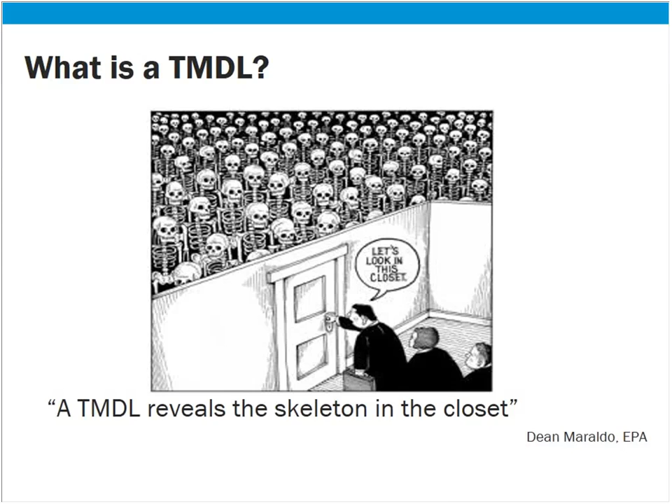As an example, Wisconsin is currently developing large scale TMDLs covering the Wisconsin River Basin and Upper Fox, but we started out with the Rock River and the Lower Fox. Both of those areas had substantial urban areas. As we developed those TMDLs on a basin scale analysis, we started to run into challenges with how to link that TMDL analysis with the implementation that was going to follow.

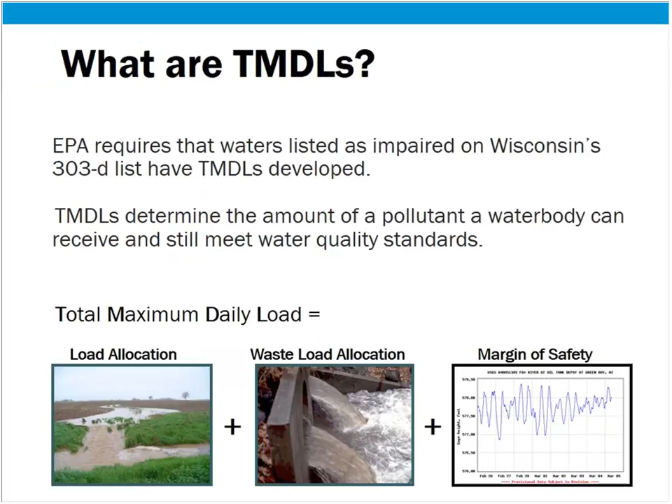Quickly, everyone on the call should know exactly what a TMDL is. It's the total maximum daily load, broken into the load allocation and waste load allocation with a margin of safety. That waste load and load allocation are again broken into a waste load allocation and load allocation. We'll be emphasizing the permitted MS4s on this call, but the load allocation also includes a set aside for non-permitted MS4 areas.

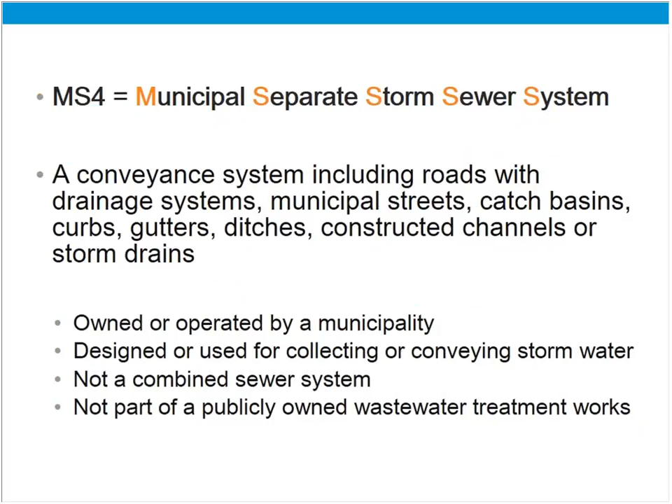A definition of the MS4: it's the conveyance system including roads with drainage systems, municipal streets, catch basins, curbs, gutters, ditches, constructed channels, or storm drains. They are owned or operated by a municipality. A lot of times I hear the term MS4 misused because people imply that the permitted municipal area is an MS4. An MS4 can be part of a permitted or unpermitted municipality—it's just that the drainage system is owned or operated by a municipality. It is also not a combined sewer system and not a publicly owned wastewater treatment works.

Another thing with TMDLs: they must have an expression of the allocation on a daily basis. This is one of those skeletons in the closet, because when we were working with our MS4s, it doesn't rain every day, it doesn't rain every week. So when they were seeing allocations on a daily basis, they were really struggling with exactly how they're going to meet them. They said, well, we meet them on the dry days, and on the wet days, we don't.

But a TMDL can be implemented on different time steps. Right now, as Caroline goes through the SLAMM model, we're using an annual implementation, but Roger will be touching on research which will eventually move us toward a seasonal implementation, especially when you look at the phosphorus loading patterns of spring and fall being the dominant time periods for phosphorus loading.

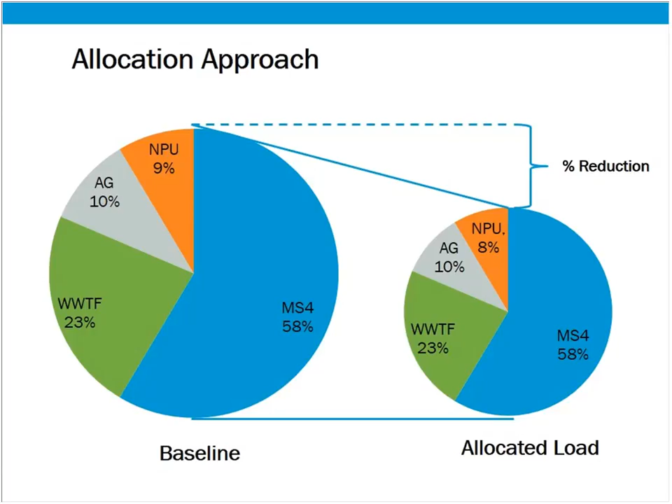What we've done in Wisconsin is use a proportional reduction methodology based on that baseline condition. I think what's important to take away from this slide is the term baseline—it's not an existing load, it's a baseline load based on regulatory requirements and obligations.

On the agricultural side, or non-point side, we also mirrored this approach and have a series of performance standards. So when we look at the first step, the TMDL, we see where these statewide requirements are. If these are being met, where are we at with our pollutant load? Do we meet the water quality target? If we do, we're done. But in most cases those performance standards were not sufficient, so we do additional reductions from that baseline condition.

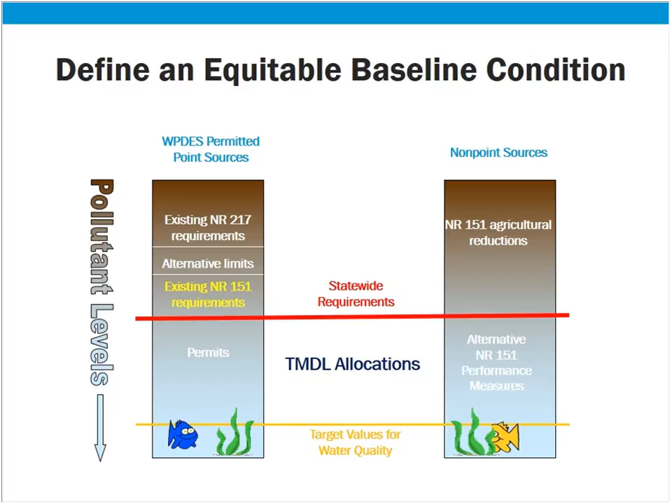So the terminology that becomes important as we move forward with the next presentations is this existing conditions, baseline, and no control. Baseline is what the stormwater or municipality would be discharging if they met the NR 151 requirements. Existing is where they are at now relative to that baseline condition, and no controls is something we've defined in our guidance, which lays out exactly what that load would be if there were no stormwater controls present.

And under certain road widths, for example, and certain development patterns, we have something called standard land use files, which really set that no-control condition. So if a municipality wants to start embracing green infrastructure and narrowing their roads, for example, you can get credit for that, because your no-controls baseline is the standard development pattern.

So a little background on NR 151, subchapter 3 covers these non-agricultural performance standards. We have performance standards for post-construction and new development, but the one that really gets pulled in for the MS4s is our developed urban area standard. We had promulgated a rule that required a 20 and 40% reduction in TSS that enters waters of the state, and this was done through a modeling approach.

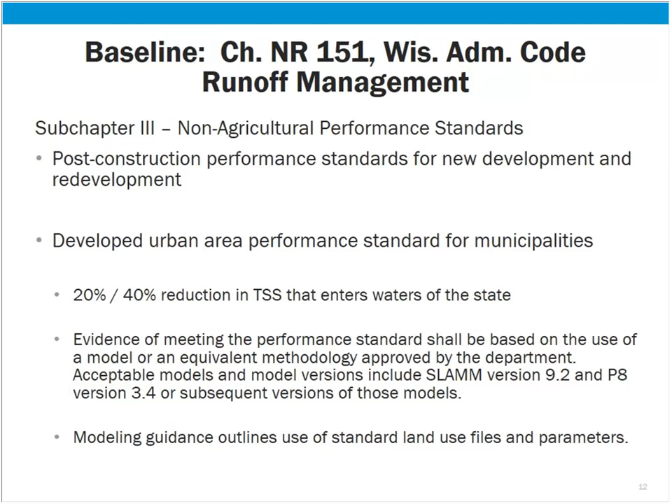So again, I mentioned earlier that the model used most is SLAMM, and then to some extent also P8. There'll be much more information coming on about SLAMM in a few minutes, but it has been used across the country, and a lot of the data that's used to support it is readily available, and both Caroline and Roger will be speaking on that.

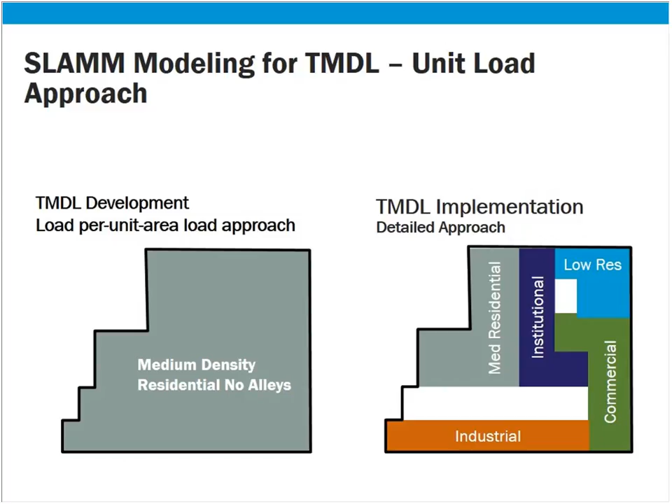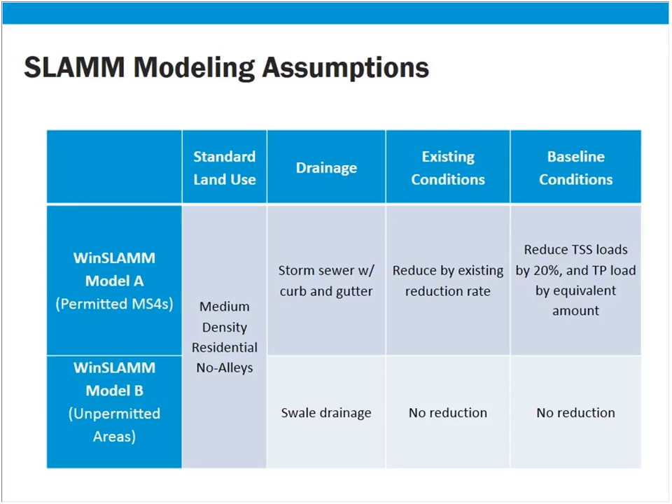So when we do this analysis, the slide shows that standard land use file, and Caroline will be covering what the standard land use files are, but this is, again, medium density residential with no alleyways. And when we do this analysis, we break it out for permitted and unpermitted, and we adjusted those files based on whether it was permitted or unpermitted. For the most part, our unpermitted areas are the smaller municipal areas that tended to not have a significant amount of curb and gutter, so they were given a swale drainage. Then they start off at an existing condition, and the baseline for the TMDL is a reduction of 20 or 40% in the equivalent TP load for that baseline TMDL analysis.

One of the questions we've gotten early on from the consultants is, why didn't we just use the analysis they did already, since they've all modeled the MS4s? One of the things is that rule NR 151 established a definition for what the developed urban area was, and that doesn't necessarily encompass the entire city or village that would be permitted under the TMDL. So a lot of municipalities will be having to update their NR 151 analysis. Also, the time period used for the NR 151 analysis tended to be a 1 or 5 year simulation period, whereas for the TMDL we're doing simulations to match the often 10 or 12 year period that's used in the TMDL.

I covered earlier about the Milwaukee TMDL, and it was a very large scale TMDL with 43 permitted MS4s and 12 general permits. It's important to note that we don't differentiate our requirements between permitted individual and general permit MS4s, and we also don't differentiate requirements between phase 1 and phase 2.

So in this case, the TMDL analysis was a little different in that the urban loading analysis was performed using a model called HSPF, part of a previous study done for a regional water quality management plan. But one thing that came up early on is that HSPF didn't differentiate between the different source areas to the same extent that SLAMM does.

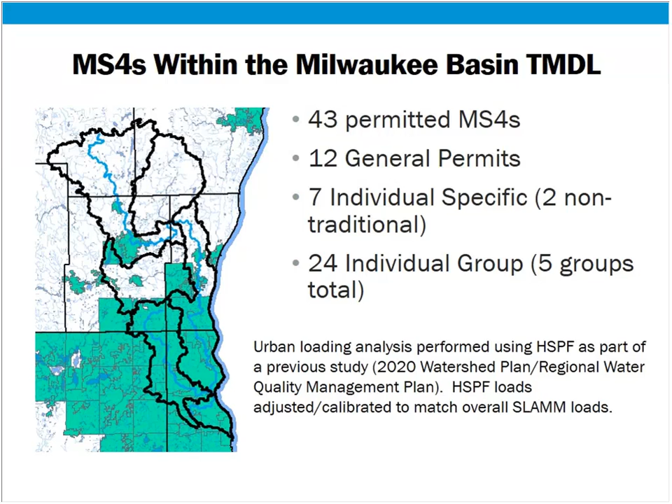So again, we were able to account for these source areas and stuff that I think you'll see are very important as Caroline goes through part of her presentation.

Another thing that came up in the Milwaukee project was addressing combined sewers, and I know this is an issue across the country. In Wisconsin, only portions of Milwaukee and Shorewood, a suburb located just north of Milwaukee, are covered by combined sewers. One thing that was interesting is when we did detailed SLAMM analysis of that combined sewer area, because all that stormwater runoff was being captured and treated by the wastewater treatment plant, there was actually a 95% reduction in the stormwater loadings going to the receiving waters.

But obviously the issue with the combined sewer is combined sewer overflows. So Milwaukee Metropolitan Sewerage District had embarked on constructing a deep tunnel system, which on average now results in just under 3 discharges a year under extreme events. Those CSOs are regulated under Milwaukee Met's permit, which includes a long-term control plan with the elimination of CSOs. So when we addressed the CSO aspect in this TMDL, they were not assigned a waste load allocation, because the permit assumes there will be an eventual elimination of the CSOs through their long-term management structure.

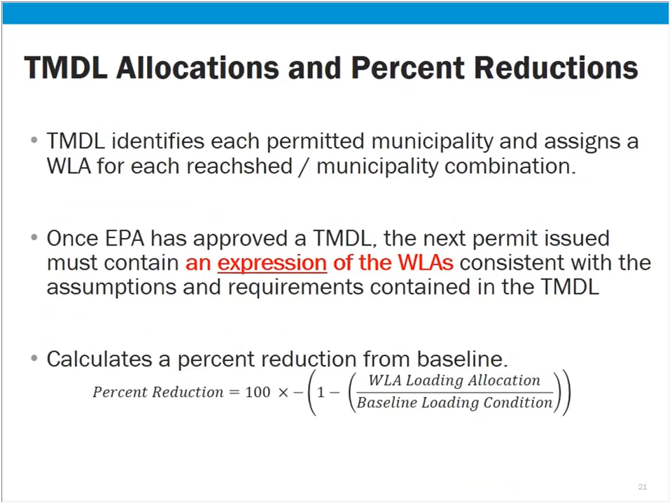What I have here is the calculation of the percent reduction from baseline. So when we set that waste load allocation, we can go back and compare it to the baseline loading condition and calculate the percent reduction needed for the municipality to meet the TMDL.

So we've gone forward with an implementation strategy using percent reduction, and there are a couple of reasons for that. One is that the aerial extent of the MS4 boundaries doesn't always match what was used in the TMDL—municipal boundaries are constantly expanding or changing, so it's hard to get an exact boundary set. This percent reduction approach allows flexibility in addressing changes in the municipality.

Another big issue is that at the basin scale, storm sewers significantly change what might look like surface topographic breaks. So the percent reduction approach lets you continue applying that percent reduction to a reach shed regardless of how boundaries change due to storm sewers.

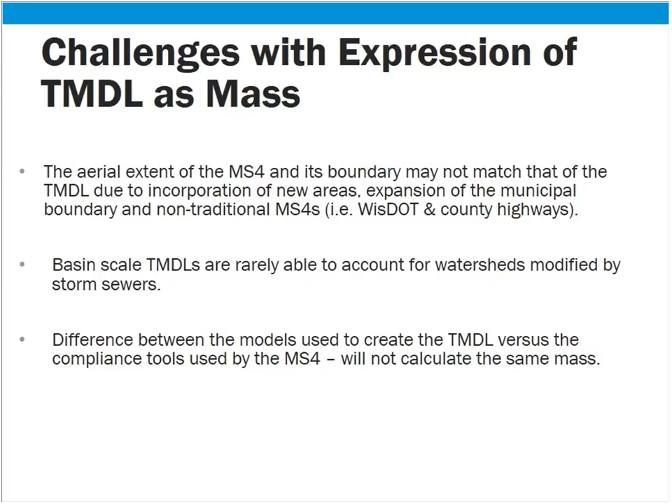Another reason is that this percent reduction framework was already in place as part of NR 151, so it was something all our municipalities were comfortable with and had already engaged in. Most of them just take the models they already have, maybe expand them a bit to include areas not previously incorporated, and then check where they stand in relation to the percent reductions from the TMDL.

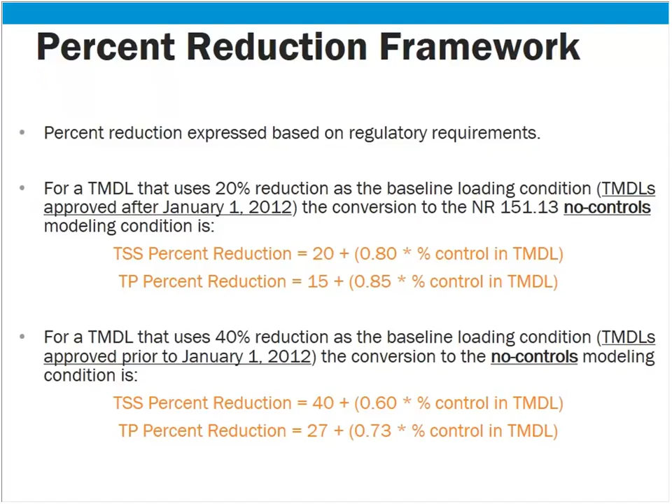One thing I mentioned earlier is that we have this 20% reduction and 40% reduction. The guidance outlines both requirements, and everything is measured from a no-controls baseline, so it's expressed in the same terms NR 151 used. We had to include both 20 and 40% because our legislature repealed the 40% requirement. So we have TMDLs developed before January 2012 that used 40%, but now all of them start at a 20% baseline.

In implementing the percent reduction framework, the municipality goes through and does their analysis at no controls, applies that percent reduction, and gets the total mass they need to reduce to meet the TMDL. That mass might differ from what's in the TMDL's waste load allocation for numerous reasons, due to different scales of modeling and other factors, but in general we've found they're within a few percentage points of each other—very close.

Then what the MS4 does is go through and see where they stand in relation to these needed reductions, and they start moving forward with a plan.

TMDL reduction or compliance was something that was maybe a little difficult for a lot of municipalities to grasp initially—that the TMDL reductions are modeled or simulated predictions of the reductions needed to meet water quality standards. So many municipalities thought that if they meet these percent reductions or waste load allocations, they're in compliance and done. But in actuality, it's the ambient stream monitoring that determines whether the water body can be delisted. So ultimate compliance is tied to delisting the water body.

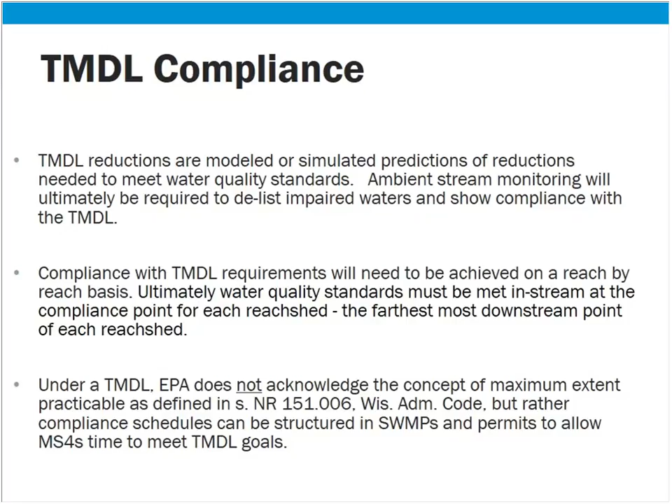TMDLs don't acknowledge this concept of maximum extent practicable, where the TMDL is set to meet water quality standards. So if a municipality says we can only get to, let's say, a 50% reduction, and the TMDL calls for an 80% reduction, there's not the use of a maximum extent practicable where they can say, oh, we're done at 50%. So what we were able to negotiate with EPA is an extended compliance structure that allows MS4s time to meet the TMDL goals. And the best way to meet those is through redevelopment.

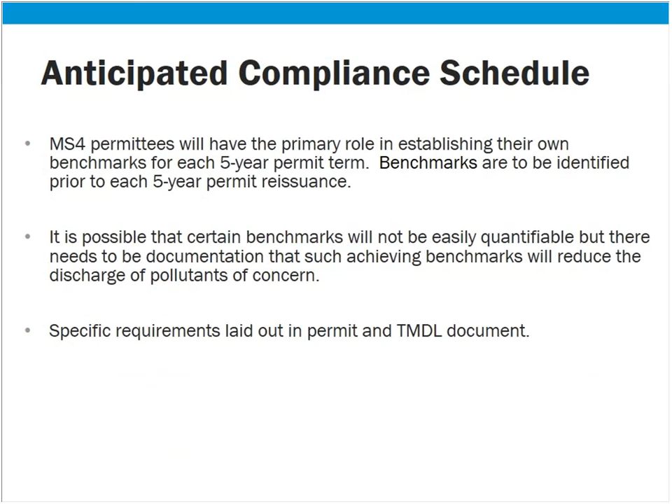How we set up the compliance is that the MS4s will have benchmarks that they set for every 5-year permit term, and those benchmarks are identified in each permit. To some extent, the MS4s will take a very active role in establishing what those are. Those benchmarks can be a combination of practices simulated in SLAMM or other practices that may ultimately get us to the water quality standard. Those specific requirements are laid out in the permit.

Again, I mentioned earlier that our permits, whether they're phase 1 or phase 2, are all the same. So starting out, the first permit term after the TMDL is approved, the municipality goes through, updates their storm sewer map, and identifies any areas that should be excluded or included that were not originally included or excluded in the TMDL. Then they start doing their SLAMM analysis and provide a summary of where they're at in relationship to the TMDL reduction—basically, what's the existing load. And then they come up with a plan to show overall progress in meeting those TMDL reductions.

Again, if you're interested in seeing more about our permits, that's also on our webpage. So if you go from the Stormwater site and just click on permits, that'll take you to this website.

So with that, I'll be handing off to Caroline, who will be covering the SLAMM analysis. I'd also like to thank both Dave Werbach and Bob Newport from EPA Region 5, who worked with us extensively to develop this approach and sat on an extensive team that I think Jim was on. We had municipalities from around the state who helped develop this approach.

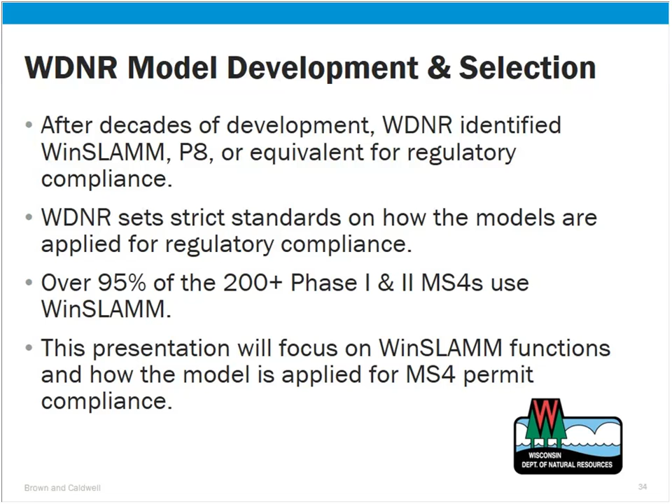So what can WinSLAMM do? Why would you use a model? Why wouldn't you just use the standards that the DNR has in place? Well, it can tell you the actual sources of where the pollutants are coming from.

It can tell you where the pollutant loadings are for different land uses without any stormwater control measures in place. It can tell you how these things change as development increases—say, low density development to medium density to high density development. It will tell you what different stormwater control measures will do, and then you can put in various treatment trains of stormwater control measures to meet the regulatory requirements and the cost, to find out what will help you meet the requirements with your least cost option. And basically, said a different way, which drainage areas generate the highest versus lowest loading—we have some graphics later that give an example of that.

How much pollution control do individual treatment systems achieve? If, as Kevin said, you need to reduce phosphorus by X%, how can you do that?

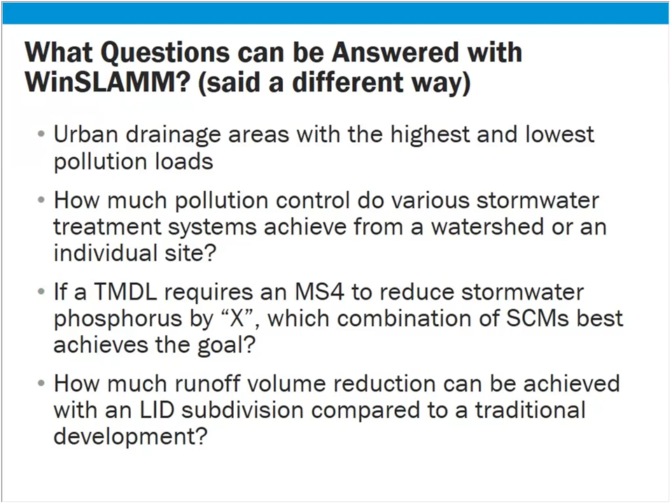So what can't you do with WinSLAMM? This is very important: it does not evaluate the runoff volume from snow melt. So for areas of the country that have winter, where it snows and the snow stays on the ground through the winter and then melts in the spring, it does not evaluate the runoff volume from the snow when it melts, but it will evaluate the pollution load left on the ground after the snow melts.

It also does not evaluate base flow conditions in the stream. It generates the urban pollution load to the stream, not the runoff volume present in the stream during dry weather conditions. It doesn't do in-stream processes, so it will not route your pollution loading through a river or a lake.

It does generate hydrographs and particle size distributions, and it does route them through the control practices, but it doesn't do complete routing like SWMM does with the St. Venant equations.

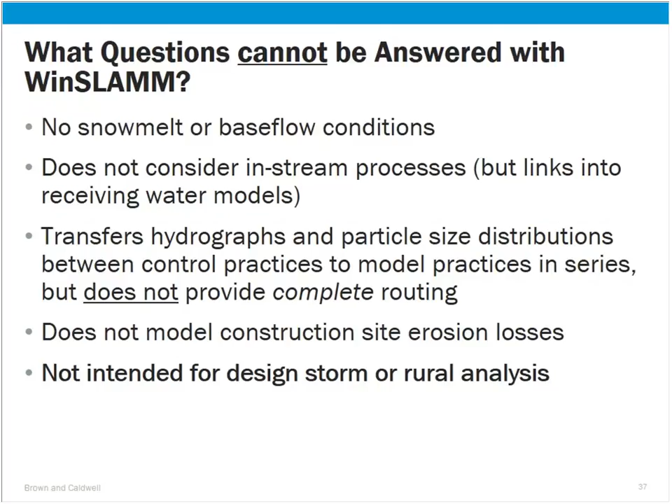It doesn't do construction site erosion, so it is a developed urban pollution model, and it does not do design storms, so your SCS type 2, 100-year storm, not that type of model, and also is not an agricultural model.

So what can it evaluate? This is a list of some of the pollutants it can evaluate. Runoff volume and TSS are always evaluated, and then you can add these other pollutants. And if you have data for a pollutant that's not on the list, you can add that pollutant too.

You can basically create your own pollutant file and then also evaluate that through the various stormwater control measures that are in the model.

So what stormwater control measures are in the model? This shows a list: wet detention ponds, porous pavement, street cleaning, catch basins if they have sumps and are cleaned, grass swales and filter strips, biofilters, bioretention, infiltration, green roofs.

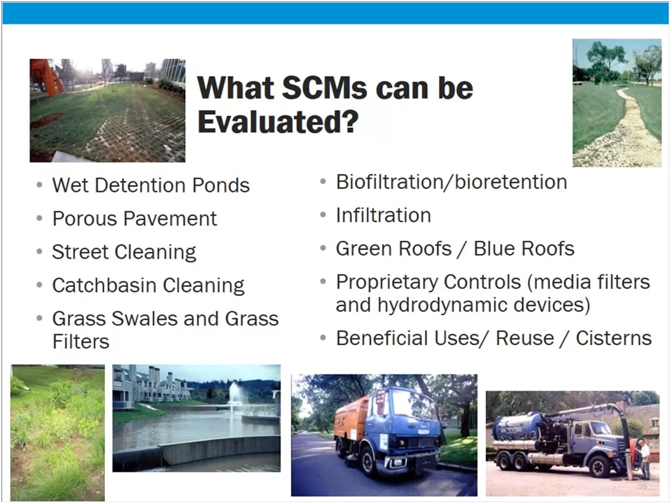We just added media filters, and then beneficial uses like reuse and cisterns. So all these stormwater control measures are in the model, and they all use their processes and the research data that has been collected over the years to evaluate their effectiveness.

So where did WinSLAMM come from? It started its development in the 1970s, and it actually stemmed from street cleaning. And then it slowly grew through basically lots and lots and lots of research. Roger Bannerman, who's going to speak last, is intimately familiar with a whole bunch of this research.

And then the first Windows version was developed in 1995. In the 2000s, we moved it from a text-based version to a database version, and very, very soon it is going to be compatible with GIS, and it is continually being updated with research data as it becomes available.

So why is it unique? Well, it's based on actual monitoring data, so the results you get really do match what you get in the field, assuming your rainfall files are what actually happened and your drainage areas are what actually happened.

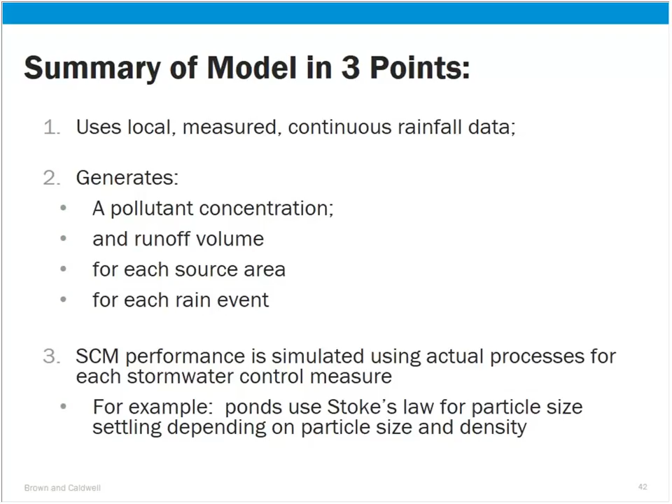So the model is all based on small storm hydrology. Some of the various states' stormwater manuals do use a subset of small storm hydrology. They don't go as detailed as it, but they do use a little bit of it. So as we're going through it, depending on the state you're from, you might recognize some of the equations once we show you those. But small storm hydrology is basically the concept that the smaller and medium-sized rainfall events generate most of the stormwater pollution.

So the small rains, the smallest ones, typically less than half an inch, they account for the largest number of rain events. And ideally, if you could, you would infiltrate these so that you'd essentially eliminate the runoff from these in an ideal world.

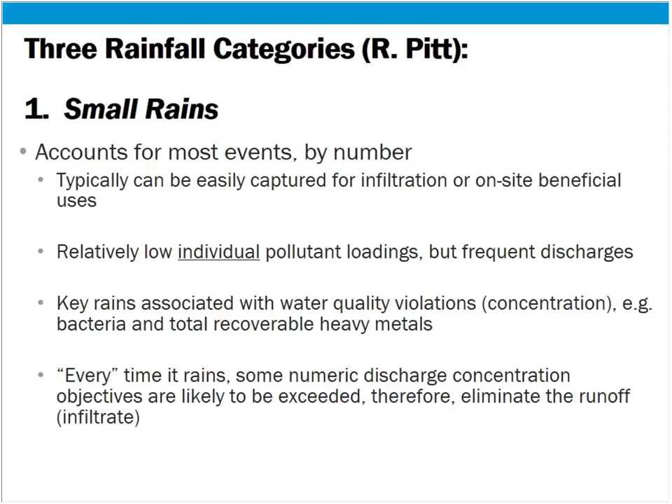And this is all from Dr. Pitt's research. Dr. Pitt is the main author, the original main author of the model. The medium rainfall events, so typically from half an inch to 2 inches, depending on where you are in the country, are responsible for most of the pollutant mass discharges.

So in this category, you want to either capture them and infiltrate them if you can, but once you get more towards the 2 inches, it's hard to infiltrate something that large, so then you're going to move more to the treatment of it instead of infiltrating the entire thing.

And then the large ones, these are more what we would think of as our design storm events. Those are not cost-effective to treat in terms of stormwater pollution reduction. And these are typically the events we think of when we think of flooding. So we want to make sure that our wet detention ponds and our biofilters can handle these and not be hurt when they come through them. But they're not necessarily going to fully treat all the runoff from, say, a 100-year event.

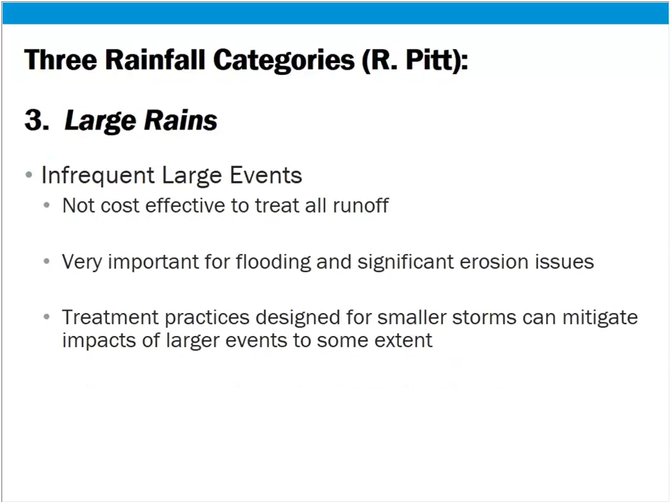So this again reiterates small storm hydrology, and the reason we reiterate this so many times is because a lot of stormwater practitioners, when they start their careers, started with design storms. So when we move into WinSLAMM modeling and water quality modeling, we're moving away from the concept of design storms to continuous simulation, looking at the smaller storms, because most of the pollutants from stormwater runoff come from the small and medium-sized storms.

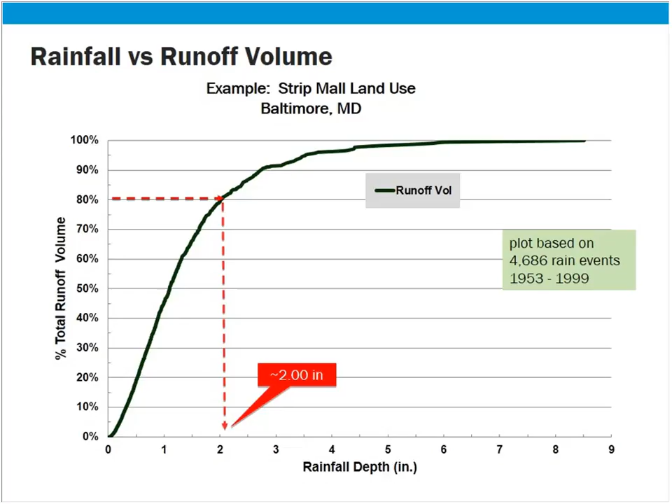And then, from small storm hydrology, because we're looking at each of the rain events, the very smallest to the largest, what also comes out of small storm hydrology is that within each land use, and then within each land use, are all these source areas. So within residential, commercial, industrial, institutional, you have roofs, parking lots, sidewalks, streets, landscaped areas.

Well, a parking lot in a residential land use generates a different concentration than a parking lot in a commercial land use. And we know this because of all of the research data that's been collected through the years. So when you do your WinSLAMM evaluation of your municipality, and you're modeling your parking lots and your roofs and your sidewalks and all these different land uses, the model is calculating the runoff volume and the pollution loading for each of these source areas and each of these land uses, and it's calculating the different runoff volumes and pollutant loadings, and they're all different concentrations.

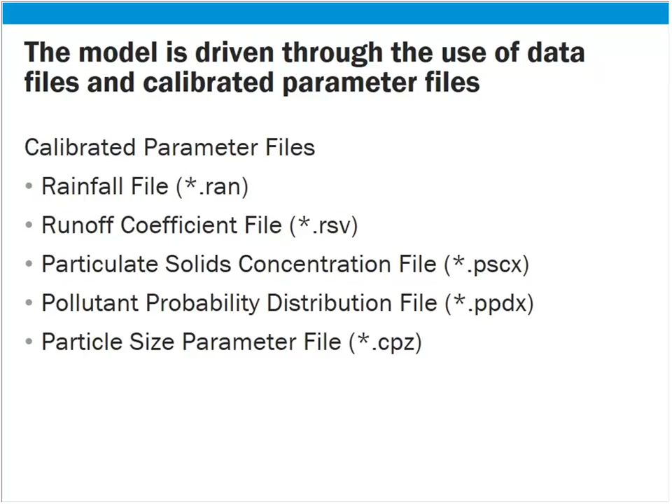You can see there are files for the East Coast, Southeast, Great Lakes, Central, Southwest, and Northwest. These come out of the National Stormwater Quality Database, plus the work of various researchers.

Okay, so here's the guts of the model. For those of you in other parts of the country, you'll recognize some of these equations, because when you're generating your water quality volume that you have to treat, this is the equation you actually use. It's simply calculating your runoff volume: your rainfall depth times the area of your source area—your roof, sidewalk, grass—times your runoff coefficient, times the unit conversion. What makes WinSLAMM different is it's doing this for every single source area for every single rainfall event. So there's a different runoff coefficient for a half-inch rain on a roof than there is for a 1-inch rain, or for a sidewalk.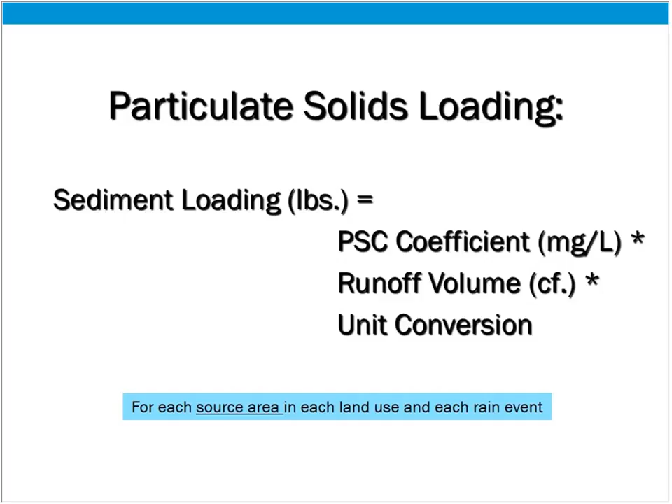Then come the pollutants. Once it calculates runoff volume and sediment, it calculates the pollutants using two different equations depending on whether it's the dissolved or particulate pollutant. For the particulate pollutant, it uses the particulate solids loading calculated earlier times the pollutant probability distribution coefficient times the unit conversion. For the dissolved portion, it uses the runoff volume times the pollutant probability coefficient in milligrams per liter times the unit conversion. These coefficients are based on research data collected for each source area, and again it's calculated for each source area, in each land use, and each rainfall event.

Once it calculates this for all the source areas and land uses for the rainfall event, it summarizes everything and sends it down the network to the stormwater control practices.

Then there are the particle size distributions and hydrographs, also generated through the modeling. Both are modified as they're routed through the stormwater control measures. Depending on the type of control measure—say street cleaning—it may only remove the larger particle sizes. So the streets are cleaned, and the resulting particle size distribution is then sent, say, to a wet detention pond, which receives that distribution and the hydrograph and further treats the stormwater runoff.

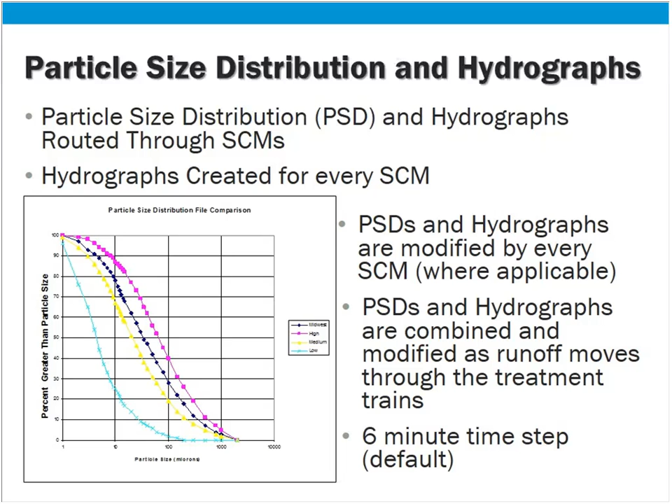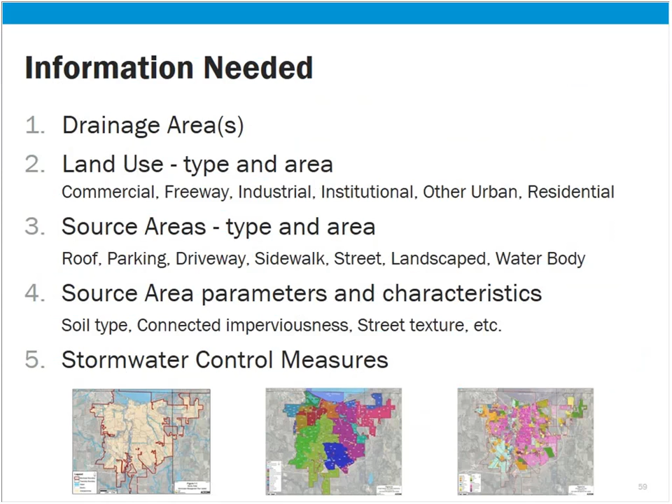Now you might be saying, wow, there's no way I'm going to collect all the sidewalks and roofs and driveways for my municipality. That's just way too much. So one tool that's been developed by Roger and others are standard land use files, and Kevin touched on this a little bit. These are files that work within SLAMM, and they are 100-acre unit files that represent typical land uses that you would see in a municipality.

So there are files, for example, 100 acres of medium density residential, 100 acres of medium industrial, 100 acres of a park, 100 acres of a shopping center. And so we use these files so that we don't have to measure source areas and whether or not they're connected or disconnected.

Now, when we use these in different parts of the country, or parts of the world, for example, we did a project in Calgary, Alberta, Canada. Their high-density residential was a lot denser than our high-density residential. So we created a Calgary high-density residential standard land use file and used that.

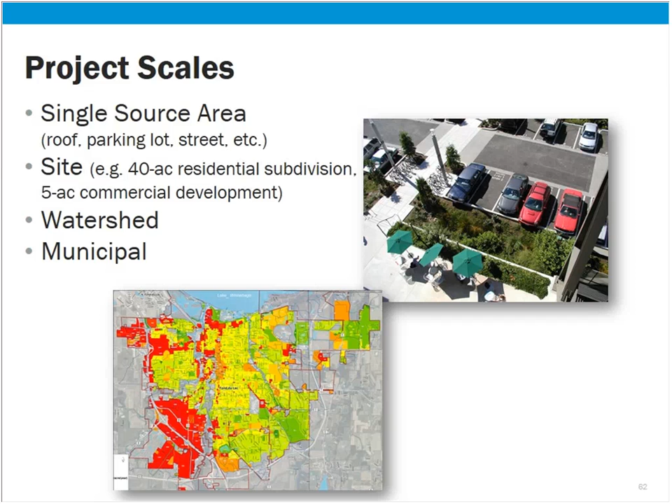And then again, more types of projects - green infrastructure and low impact development. Those are very important tools in our toolbox to help us meet TMDL compliance. So we're using the model for both those.

New development and redevelopment in Wisconsin - municipalities, municipal engineers require their consultants to use either P8, SLAMM, or an approved equivalent to show that they're meeting their ordinance.

And then the alternatives analysis and stormwater control design. When we go to the next level from planning to design, we use SLAMM to make sure that we're still achieving the goals that we wanted to achieve with the actual outlet structure and configuration that we are putting out in the field.

And as the model grows and as our users grow, we add more and more types of output. A lot of the output available in the model is a result of our users and what they want to see, what they need to see for their regulatory compliance. So this list shows you just a few examples of what you could get out of the model if you needed it. And we're always adding more pieces depending on what our users need to see.

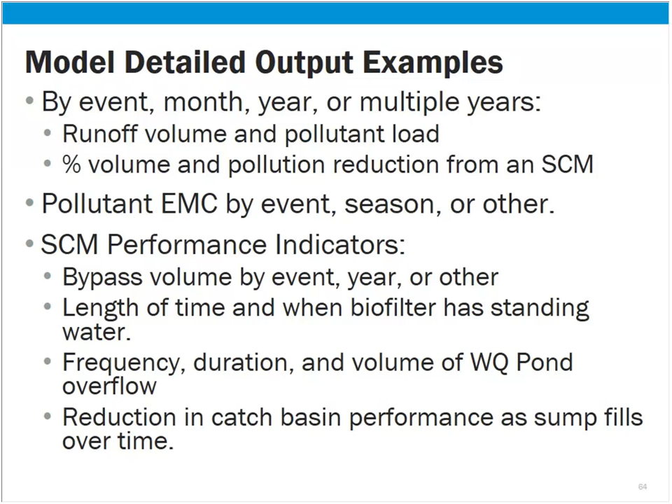Yeah, I've had a couple that have come in, so I'll try - and I think some of them were answered as we continued through the presentation, so I'll try not to ask those, but for those who entered them in the chat box and you had a piece of the question that you don't think was addressed, and I skip over it, please let us know in the survey at the end, and we'll make sure we get exactly what you want answered. So two quick clarifying questions for Kevin. One was what municipalities specifically were talking about for this webinar. And then the second question was just for clarification, confirming that the MS4s baseline is always equal to the TMDL allocation, or is that not always the case?

I'll start with the second question. The baseline used for the TMDL is always set at that NR 151 requirement, which is that 20 or 40% reduction. So what Caroline just covered, all our municipalities have gone through and done this analysis, and that 20 or 40% reduction is applied to those municipalities. That resulting pollutant load is used and fed into the TMDL analysis to say, are we meeting water quality standards? And if we're not, we start a proportional reduction going down from that baseline. So the baseline always starts at those NR 151 requirements.

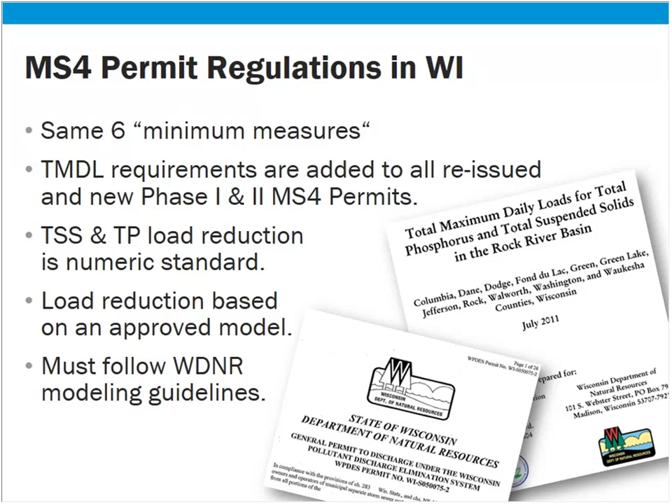So just as an example, this is just a generic example. If you had a waste load that said you had to reduce your pollution, whether it's sediment or phosphorus, let's talk about phosphorus, by 50%. The basic steps: figure out what your base condition level is. As Kevin said, that base condition is the pollution level under meeting the former NR 151 requirements, which every city has to meet. Think of it kind of like a secondary treatment level for wastewater.

Everybody's got to do that, and then there's more treatment above that normally required to meet a water quality condition, but the first level of compliance is this base condition, meeting the NR 151 requirements. Let's say you had to reduce this by 50% to get to a certain TP phosphorus goal, and that goal is set for each impaired water within the urban area, and you go about figuring out how to achieve that reduction.

Now I'm going to make this into a real example here, so I don't want to dwell on this slide. The guidelines that DNR has out there, again, as Caroline alluded to, they have standardized rainfalls to use depending on what part of the state you're in. There are 5 different regions.

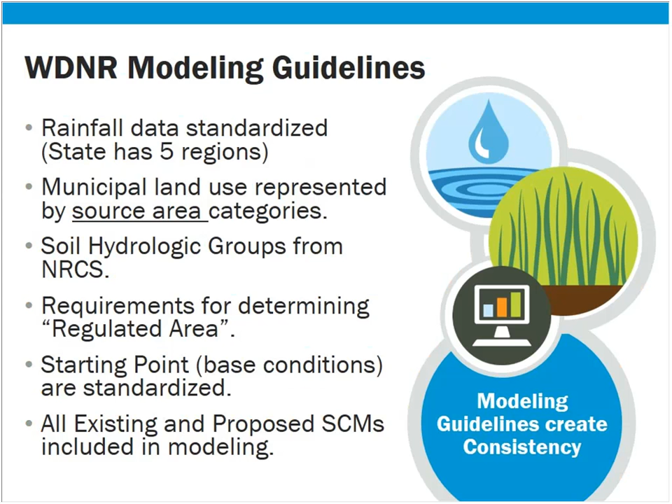The municipal land uses are represented by source areas, defined on a standardized basis by the agencies. We use NRCS soil conditions for our infiltration issues—in other words, the hydrologic groups define our landscaped and non-impervious or pervious areas. We also have to step through for our cities and figure out where the regulated areas are. Not 100% of the municipal boundary is a regulated MS4 area, and I've already touched on these last two bullet points, so I'm going to fly through that.

Basic procedure: we use the model, as we said, to come up with a base condition, meaning the regulations are being met. We use a model to calculate existing percent control, which accounts for the current stormwater management measures a city already has in place. Then we optimize proposed management, identify those measures to meet, let's say in this case, phosphorus reduction, TP, and then prepare a schedule for implementation. That's nothing very unusual—that's a pretty straightforward process.

The unique part is that, in fact, it's done on a more objective numeric basis.

So a case example here, just to walk through real quickly. I'm going to talk about a city in south central Wisconsin: Janesville. For us, that's a middle-sized city, 64,000 people. Here's the area we're talking about. The Rock River Basin is about 3,600 square miles, covering a good chunk of south central Wisconsin. It has hundreds of impaired water bodies for both phosphorus and sediment, and Janesville is just one small piece of the puzzle. But because Janesville is an MS4, it received its permit and its TMDL waste load allocations for phosphorus and sediment.

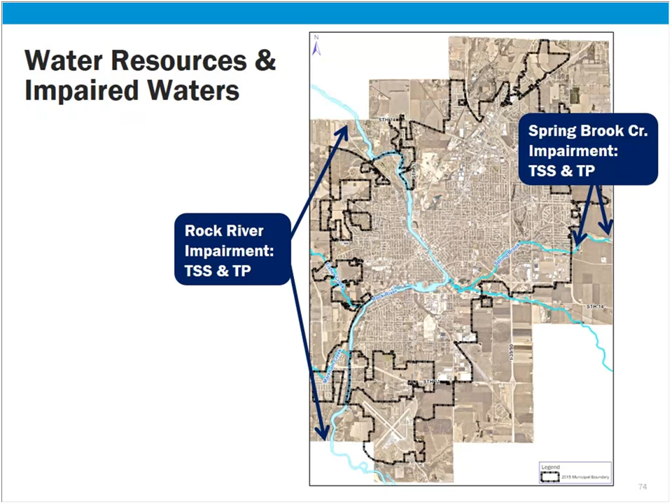So those are the impairments that the city was facing. When the TMDL came out for the Rock River, it identified Janesville as one of the MS4s. Each watershed within Janesville received a unique phosphorus and sediment waste load allocation and a load reduction requirement.

So the challenge is to come up with: are they meeting it right now with their existing management measures? If not, what can be done over time to close that gap and meet these reductions for each of these drainage basins?

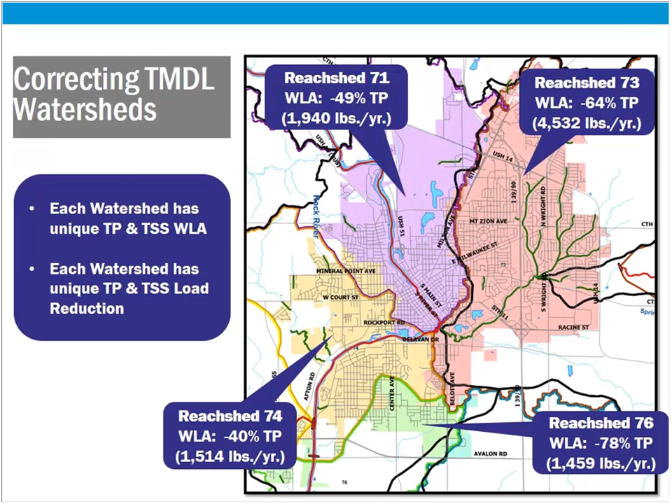The first step we do with a city is to figure out what area is actually regulated. What is the MS4 regulated area? I think there's some similarities across the country on this. For example, if you own land that drains directly to a receiving water body that does not go through a municipally owned and operated stormwater conveyance system, you are riparian, and that piece of land is not regulated by the MS4 permit.

So we did figure out which lands were not regulated because they are direct riparian to the water bodies. Also within the city are areas that are permitted by or have their own separate stormwater permits, such as the DOT—this is an interstate going through the east side of Janesville. That corridor is under its own stormwater permit, not regulated through the city's permit, and so they are going to comply through a separate mechanism, not the city's responsibility.

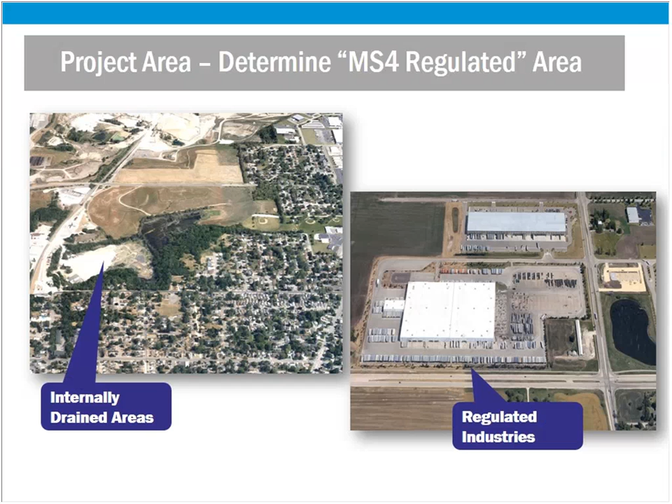In addition to that, we have regulated industrial areas, just like any other part of the country. These areas have their own individual or general stormwater permit, but they're regulated separately by the DNR. Again, the pollution loading from these footprints is not the responsibility of the MS4. Other issues may come up when you have illicit discharge or things like that—that's a different story. We're talking about normal stormwater runoff from rainfall, so keep that difference in mind.

Now we're on to accounting for the current stormwater management practices. We've cut out the areas that are not regulated from the MS4 permit. Now we go through a process to identify how well our current practices are performing.

Traditional stormwater quality basins we account for that are out there. We account for non-structural stormwater management measures such as their street sweeping program, and whether that can be improved to help achieve more pollution control in a non-structural fashion. Those are just examples of practices that we account for.

Once those are accounted for in the model, as Caroline was explaining, we're able to generate, using all the other factors that the SLAMM model uses, pollution loading conditions within the city, accounting for their stormwater control measures, and begin to focus in on areas that are high and low in terms of loadings to begin to identify control measures to reduce the gap.

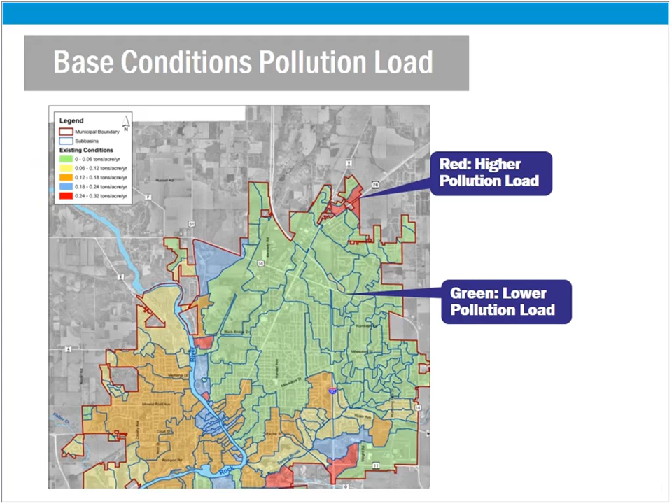And here's just another example of high and low loading areas after the analysis for their current condition was evaluated. So now we have to figure out what the gap is and what can be done to close that gap. We're going to identify these measures to meet phosphorus requirements, or maybe it could be sediment control. Usually phosphorus ends up being the driver here, since it's simply a more difficult pollutant to manage.

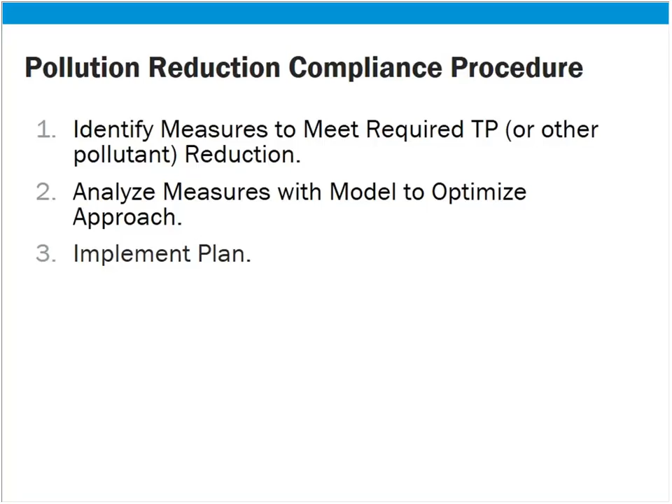Then we'll use a model to analyze which measures make the most sense, optimize their placement and locations, and develop a plan. I'm not going to go into the details of the management measures—it will take more time, and frankly most of us have a concept of what kinds of measures are out there in the toolbox. But we did come up with a level of approach for each of these reachsheds.

That's what we're calling these drainage areas to each impaired water body. We want to maximize our current practices by making sure they're well maintained, convert some existing dry basins to water quality ponds, which have a more effective pollution control value. Every time redevelopment occurs downtown or elsewhere, maximizing stormwater management measures integrated into those redevelopments helps move the needle toward closing that gap.

And then incorporating practices into street reconstruction. The city has an aggressive street maintenance and reconstruction program. When they do this, they can incorporate, and they intend to incorporate, stormwater pollution control measures as part of the street reconstruction projects. The plan itself identified about $7.5 million as an initial level of effort. It's not the full package, but it's a starting point.

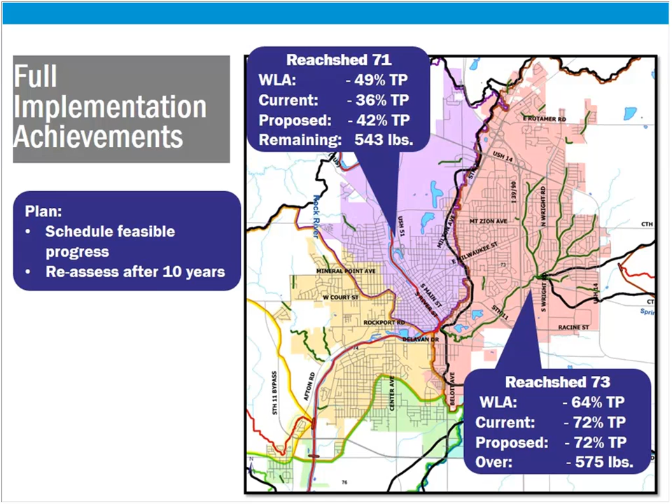But what I want to really spend a minute on is why I think the modeling approach is important—and I'm not trying to sell the model, I don't sell the model. I know it's proprietary, but it's a pretty nominal cost, we're talking a couple hundred dollars. You can go to the website and check it out.

It's been used by almost every city—I think every permitted city in the state has the model. They have people on board who run the model, understand it, can use it, and are using it for their own site developments to check against developers submitting site plans, et cetera. But the reason this works is we got this guidance from the regulatory agency to make sure everybody plays fair and we're treating everybody the same throughout the state.

Establishing these normalized base conditions for comparative purposes, as I said, levels the playing field. It allows an objective measure of progress for both the regulated and the regulators, to have a way to measure progress—not just saying that we've got so many BMPs in place, or so many control measures, or we're sweeping more frequently or whatever. We can attach, albeit modeled numbers, values that have some relative comparative purposes to say we're making changes that have occurred over the last several years.

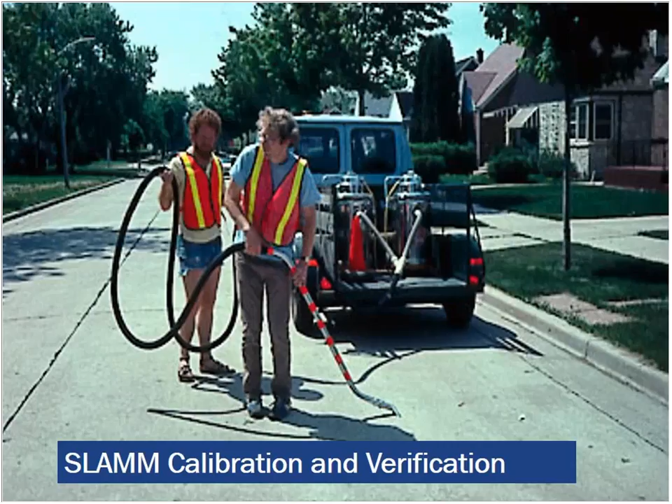Yes. So when we do these analyses for TMDL or our local state stormwater requirements, first we look at what's coming from the watershed on a no-controls condition, which is a predefined condition based on our DNR's guidelines. Most states have sort of the same thing, it just might not be as defined as what our DNR does.

And then we look at what's out there right now. Are they street cleaning? Is there grass swales? Is there ponds? And then based on that, we look at, okay, this is how far they are, and how much farther do they need to go to meet their waste load allocations.

I'll just add that quickly, Dan. When you say watershed scale, the answer is yes, but the other caveat is that we're talking about urban watersheds. It would not be appropriate to use this for an agricultural watershed. Okay, great, thank you guys.

So I'm going to ask these next two together. One is, did DNR require the use of a model, or did they provide training and outreach prior to requiring the use of a model? Was it just straight up a requirement, or was there some outreach before that? And connected to that, how much resistance was there from MS4s to being required to do modeling? Was there a problem with their capacity to conduct the analysis?

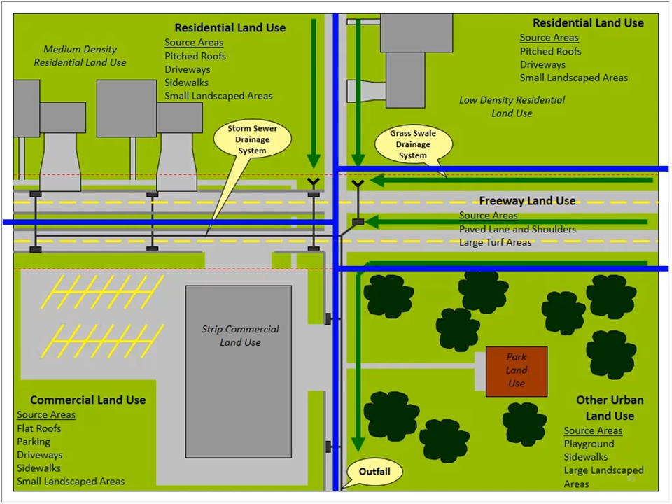When it comes to the source areas and land uses, Caroline's covered this, but I had the challenge of trying to monitor all of these different source areas in residential, commercial, all the land uses Caroline described. Within each one, I had to worry about the rooftops, the driveways, all these kinds of things, and it's been a good thing to do.

Carolyn has mentioned to you all the types of stormwater control measures the model does. I'll briefly go through street cleaning, grass swales, and hydrodynamic devices, but we have data for most of them that we've been using for calibration and verification.

The source area sampling started back in the early 90s, where we decided we had to collect some data for almost every source area, so we developed these little simple source area samplers.

The basic idea is that the hole in the top is actually calibrated for the area so they don't fill up right away. Students went out and put the bottles out before the storm, and after the storm would collect them. The basic idea was to understand the variability between one type of source area. We did many streets, many driveways, many rooftops, that kind of thing.

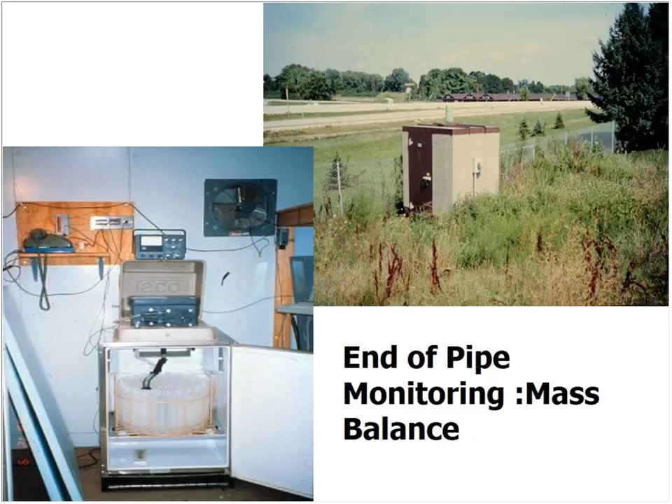Back up here again. And of course, to make it all make sense, you had to monitor the end of the pipe. So we monitored the end of the pipe of these areas so we could say, well, if you put all these numbers into the model from the source areas, do they actually add up to the number at the end of the pipe? And of course, the monitoring here was state-of-the-art monitoring, which we continue today for collecting water samples and flow.

One of the challenges in all data collection is to do something that's kind of average. We're not trying to monitor extreme situations because modeling is mostly about averaging, because we can't possibly monitor every kind of situation.

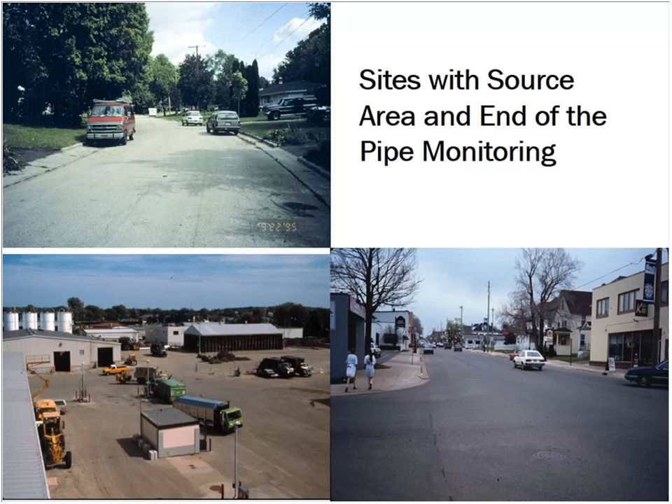So we're really nailing that flow. As Caroline was saying, she showed you how we do the small storm hydrology, and there's some large events in there too. I'm feeling good about that.

I could probably hit some of these sites right on if I wanted to, but remember, we're putting in the runoff coefficient curves or averages. I could make each one perfect if I wanted to, but we're using averages. That's the whole idea of this modeling idea.

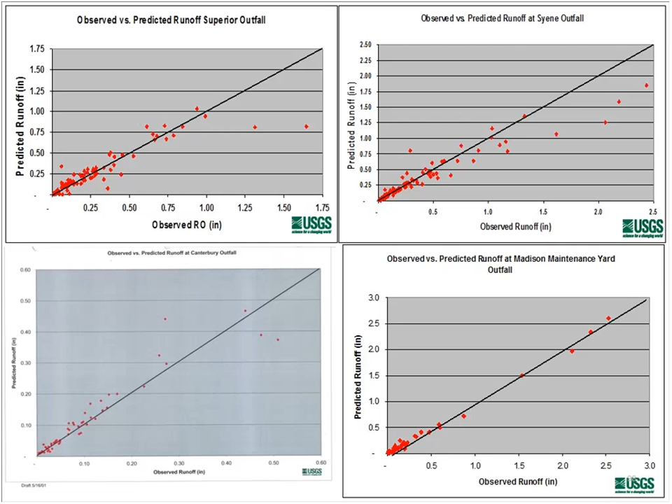Then for Canterbury, lower left, that's 1,000 acres, and again we're a little bit over, a little bit under, but in modeling that's sometimes what you're trying to achieve — being a little bit under and a little bit over. So overall, we did really well with the flow.

We're coming very close to the measured values. This is the beginning of building confidence in any model - you have to get the flow right. If you haven't got the flow right, then you really have to stop and wonder about what you're doing. But right now, I think we're doing a good job with that. Can we make some improvements? Yes, and I continuously work on that.

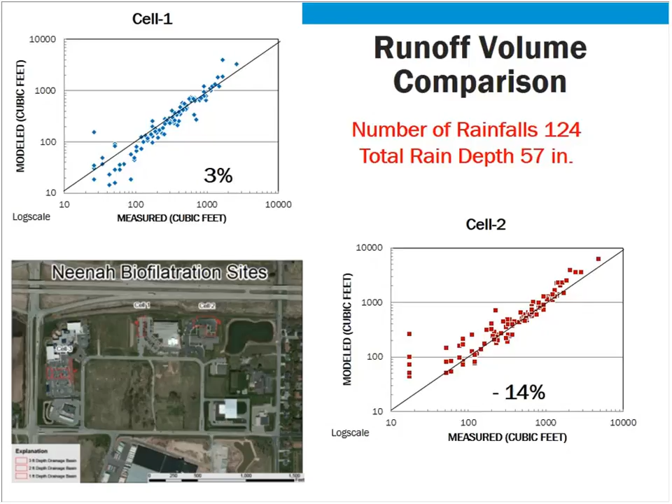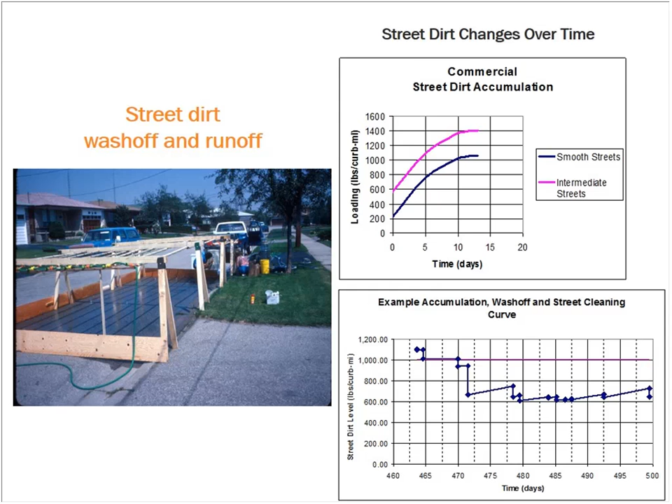Will this be perfect for every source area? Obviously not, but it's way beyond our resources to do that. But for streets, which are such an important source of our pollutant load, we've been able to do that. So again, lower right-hand corner, you see that the model actually predicts accumulation, then wash off, accumulation, then wash off - a kind of sawtooth pattern as the different rainfall events are calculated by the model.

So for suspended solids, if you look at some of the sites we've done in the past, you can see the median value is about 20% off, anywhere from 1% off to about 35% off. Again, I could hit these sites right on, but the number that's in the model, in the files that Caroline talked about, it's an average from all the sites we did to make sure I'm covering all the variability that's there. And of course variability we'll talk about in a second is something we're reducing right now, but overall I was doing really well to get that small range of numbers, given that we're doing an averaging process here.

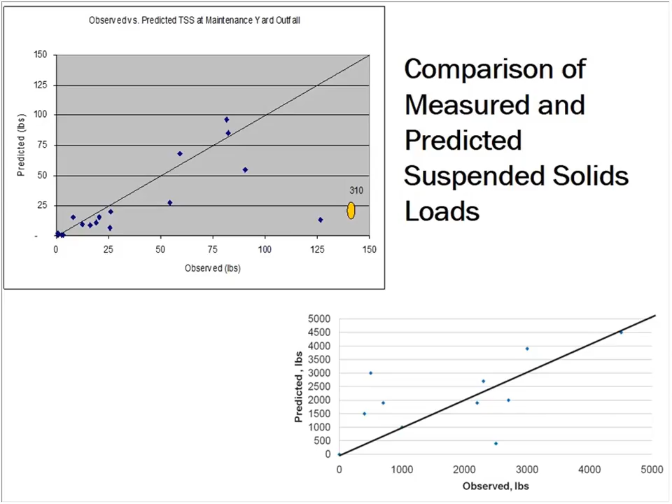And that's because I found out somebody, one of the people at the maintenance yard, backed up a truck and dumped some dirt they'd been collecting right next to the inlet where we were monitoring. So again, these are the kind of things you have to be careful of. And in the lower right-hand corner, you can see that's Canterbury, where again we predicted the TSS fairly well, a little over, a little under, throughout all the rain events we did.

Phosphorus, one of our more important pollutants that we talk about constantly. There's two ways the model has that in the PPD files. One way is the particulate phosphorus, which is the upper bar chart, and then the dissolved phosphorus, which is the lower bar chart. Usually dissolved phosphorus is about 30-40% of the total phosphorus. No surprise there, the lawns have the highest concentration, all the way down to the lower street concentrations, all right?

The lawn, when you think about the kinds of things Jim was talking about for a TMDL, might have the highest concentration but a much lower contribution, because the runoff doesn't occur that often. So in your pie chart of sources, that high concentration plays a role, but the contribution from lawns in a residential area might only be 20% on an annual basis.

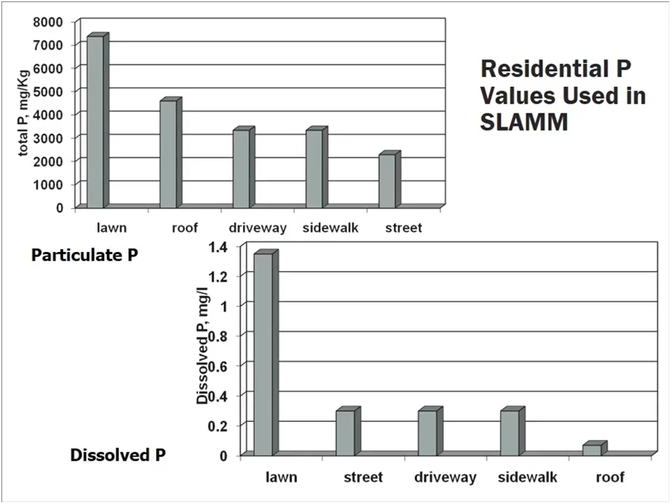The streets, on the other hand, as Kevin was addressing for phosphorus, that number is probably going to go up because we're doing a lot more work with the seasonal stuff. So that's probably going to change. For phosphorus, a median value would be about 30%. We've made real progress in that number since we started, so I'm feeling good about it. But that number is going to improve, especially when we include the seasonal stuff, and I'll show you more about that in a minute.

Remember, the numbers I've put in the model are an average of an annual data collection process, so all the numbers are just averaged together. I'm not bringing the seasonal data in yet, but we're going to be bringing the seasonal in.

Huh. Come on, that's not working. All right, okay. Again, plots that show we're pretty much right on. I can't spend too much time on this, or even getting this thing to work.

Here's an example where we have a highway, and the runoff was off by about 1 to 2%, and the TSS was off at one site by 30% and another site by 1%. Again, overall we're doing really well on predicting, even on the highway, what our pollutant load is.

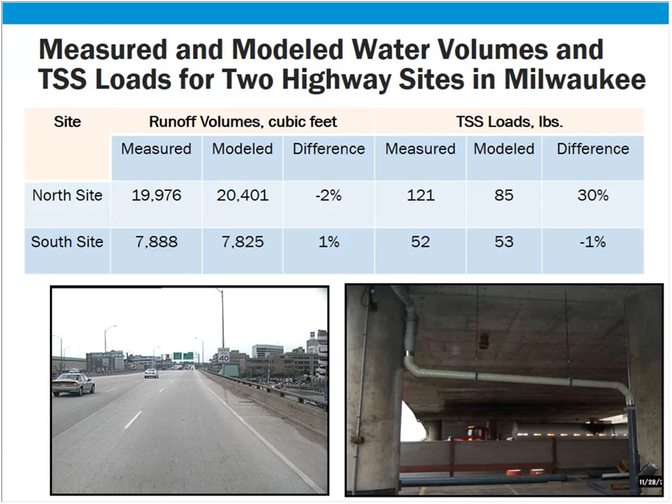On a national basis, Caroline introduced the idea that we're trying to provide a database that could calibrate the model in many different places. When Bob Pitt was doing this, it gave us a chance to add some pollutants we're just starting to work on more here, like bacteria. So I wanted to show you some data that came out of that analysis, calibrating the model on a national basis using that national database.

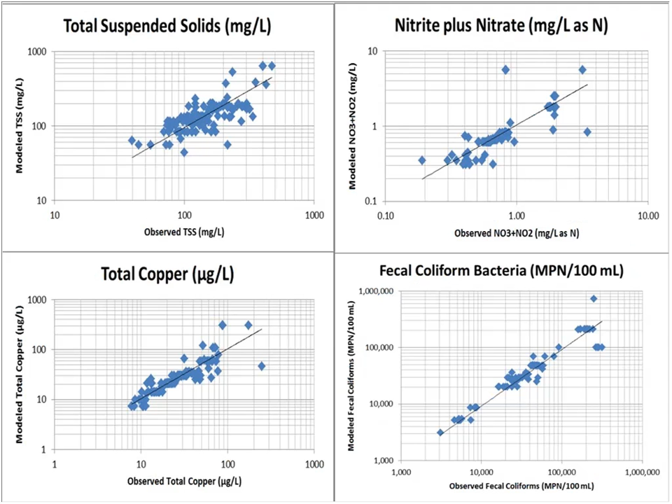You have the model number on the y-axis and the observed numbers on the x-axis. You can see for TSS we're doing well. Interestingly, look at the lower right, we did really well on bacteria, which is becoming more and more important now. Milwaukee's TMDL certainly has a bacteria component to it. So again, we can use these national databases to help us do better with these other pollutants.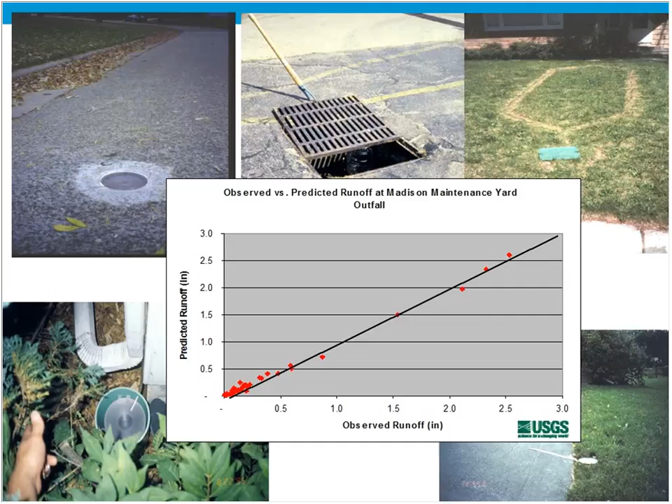So overall, taking a fairly simplistic monitoring method, we're able to develop a model that calibrated and verified really well for most of the land uses we're considering, giving us a good foundation. We got the flow very, very well, so again, we got a good foundation for doing this. But that's just kind of a beginning. We've certainly been working hard since then.

One of the crises we had over all the years I've been doing this—and I've been monitoring urban runoff since 1974—was some of the biases you get in the sampling. So the last 6 years, we've been working hard on a new method that hopefully the EPA will adopt nationally for stormwater monitoring that removes that bias. We've written 5 papers on this, and we use it for all our sampling now. So I'm very excited about it.

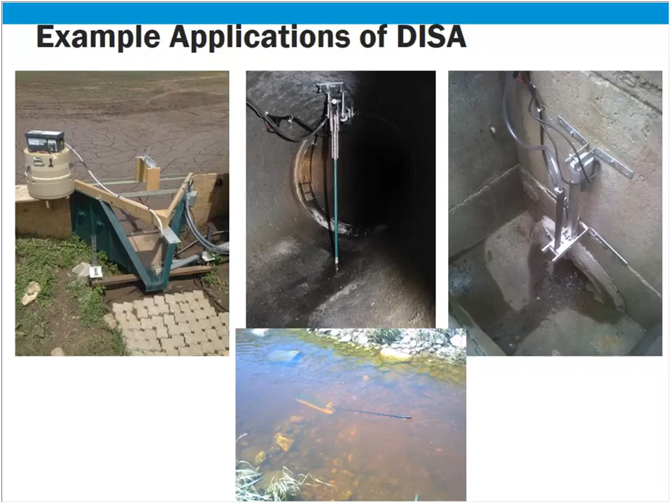We can monitor in an open channel in an urban stream where we put the device on the bottom and it goes up and down. We've been monitoring agricultural fields this way too, and seeing some really big differences in how you collect the numbers. Again, a very exciting improvement in what we're doing.

One of the key things for me, as a person trying to make the model better and look at trends better, is that it lowers the coefficient of variation dramatically so we can see trends much more clearly. I can't go into all that right now, but we've written 2 papers on this, and it's very exciting to see how the coefficient of variation is improved.

So again, we're moving forward. We have a matrix I'm filling out now. We're using the new sampling technique on all the types of things we did before, on all the source areas, the streets and the rooftops and so forth, and on the land uses like shopping centers and residential areas. We're trying to do two of those a year, and pretty soon we'll start adding some of the data to the model. It'll make some changes. And of course, very importantly for the phosphorus, we'll add the seasonal component.

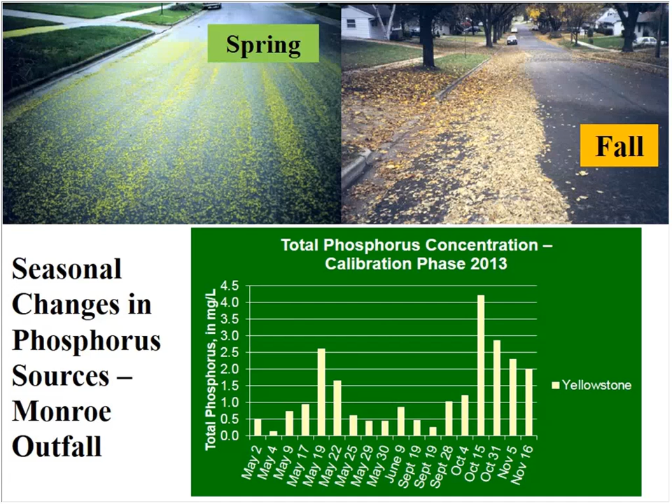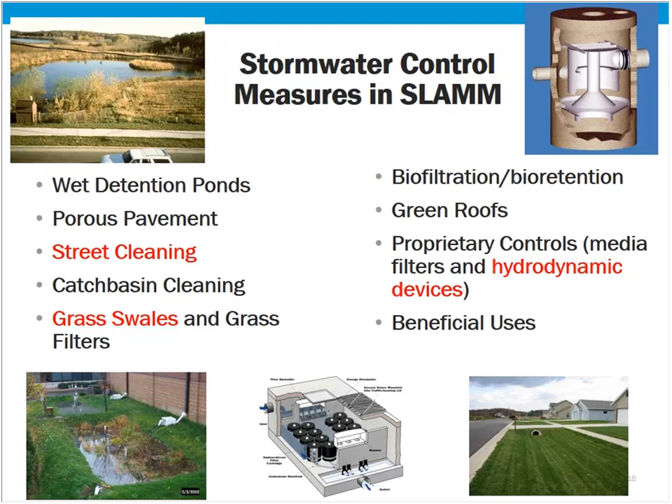All right, let's quickly go through a couple of these stormwater control measures. Street cleaning is a primary one I get constant questions about. Right now we're studying permeable pavement, bioretention systems, grass swales, leaf management—a very hot item around here, getting credit for leaf management—and we're working hard on finishing our particle size distribution work. The model can do a different particle size distribution for every source area and every land use, so we're trying to provide those numbers in the best way possible.

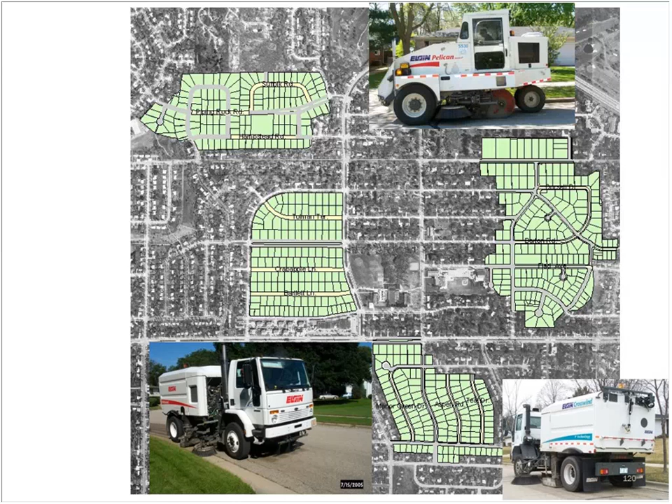Okay, street cleaning. We've done three major studies on this. We've probably spent over $3 million trying to characterize street cleaning, a very important public works activity that cities should get credit for. The basic idea is that the model develops a sawtooth pattern where you have accumulation, then the street is cleaned, then it rains, and up and down, up and down. So it's very important to get some idea of that street load.

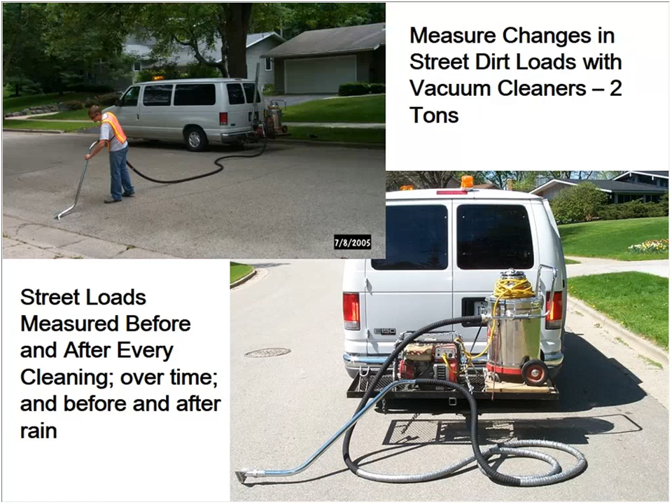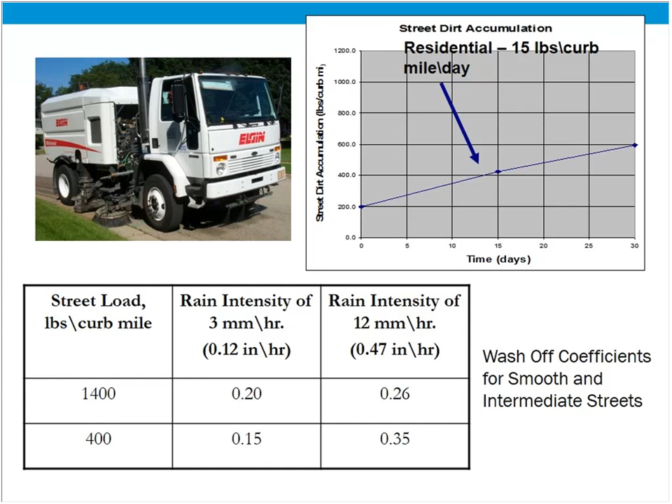And then I have wash-off coefficients that usually bounce between 15 and 30%, and they're a function of rain intensity and the amount of street load you have. So obviously more intense storms are going to have a higher wash-off coefficient. We were able to develop those kinds of things with the data we collected.

Basically the model provides the basic structure. I can put all this data we've collected into the model and ask, how well are you matching this? It's very exciting when you see these plots come out this close.

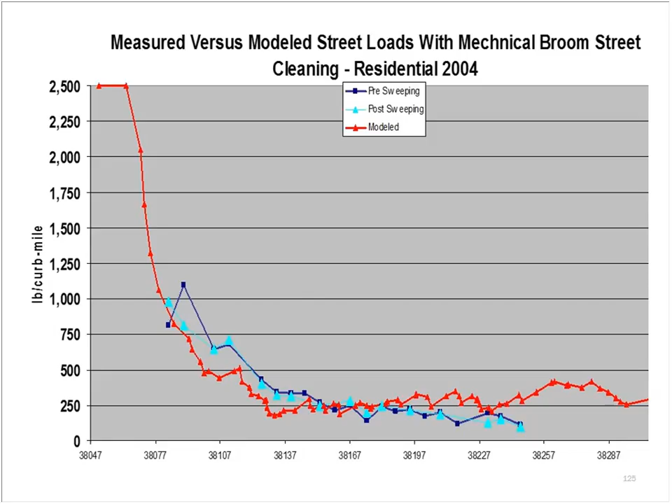So I feel pretty confident that we're hitting the street cleaning thing pretty much right on. I don't think we're going to do that kind of study anymore, but anyway, it works well. The key thing is having that structure so you can put the numbers in. When Bob Pitt originally put that together, he had the structure—what are the variables that drive street cleaning—and he got it right, so we could actually come up with something we believe in.

Just to give an example of how I can extrapolate this: we were under contract from the San Francisco Bay TMDL—I'm on the technical committee there—and they asked me, can you give me street cleaning benefits for PCBs? They certainly have a legacy problem, but the PCBs have spread around the city, so they're finding high levels of PCBs in their street dirt. So I worked with them for about a year, and they did some monitoring like I just described.

For the hydrodynamic separators, again, people want to use these things, so we did a lot of sampling. These are sites we sampled with these kinds of devices, monitoring inlet, bypass, and outlet.

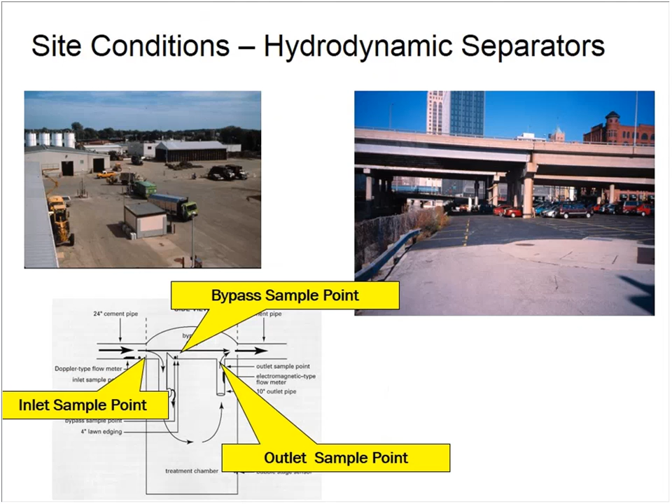I always had this goal for myself: I wanted to come within a few percentage points of what the model gave. You can see here for the Stormceptor and Vortechs units, I had a measured TSS reduction of 6% and 25%, and the model predicted 12% and 19%. I was a little flabbergasted, actually—that's pretty close, so it certainly met my standards for feeling some confidence.

Again, the structure was there. I could collect some data—and of course particle size distribution is a real key thing here—and actually match what's going on.

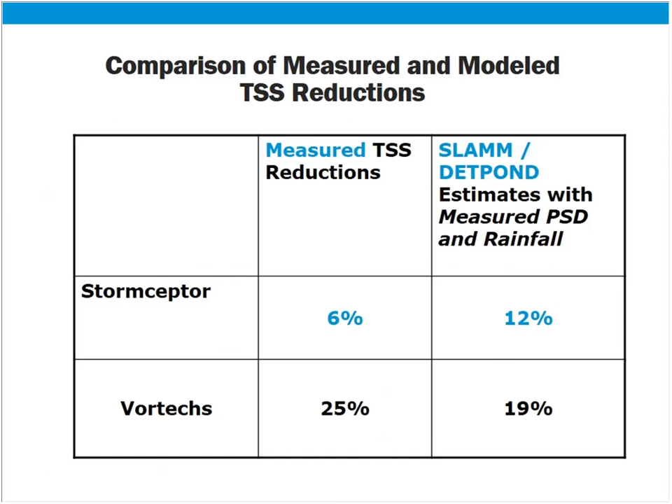For LID, that's another important thing we're all dealing with now. We had a site that we monitored with grass swale drainage—an infiltration basin preceded by a wet pond—and the idea was to monitor all of that. You can see on the right-hand side we monitored the pond and the outlets of the basin, and we had 5 years of data.

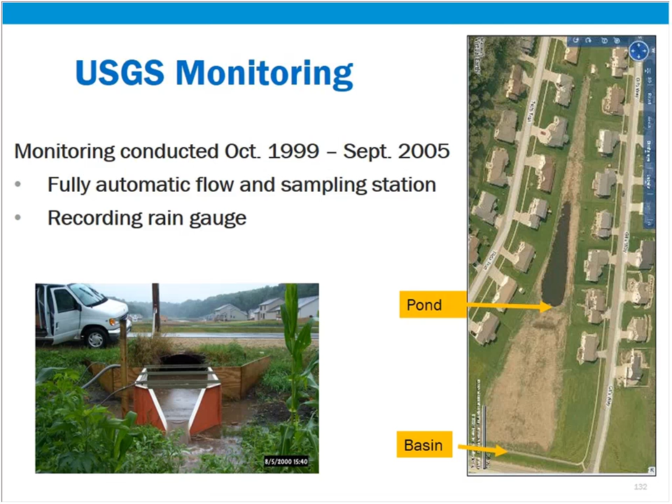So there's the strength of a tool like this. It's a lot of effort—we understand people cannot monitor every site they're going to do a TMDL on. So we've worked hard to make sure that the data in the model is as good as it can be, and we keep improving it so that our efforts to clean up with our TMDLs will be as cost-effective as possible.